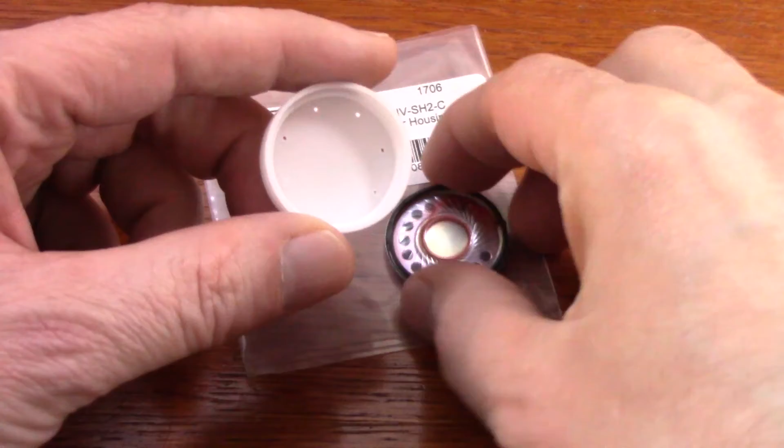So let me head to the bench and I'll show you the part that I'm going to be designing a mold for. This is a kit for a speaker enclosure. This is a small speaker. It's designed to go into a model train. And it's a press fit into this enclosure, which helps baffle the sound and prevent the sound from the back canceling out the sound from the front. I'm certainly not an expert on acoustic physics.

This particular enclosure is printed by Shapeways. What happened recently is apparently they doubled the cost or the price of making these parts. So it's gotten a little bit prohibitive for TCS. And they asked me if I could make some short-run injection molds because the volume that they have doesn't warrant making a real injection mold.

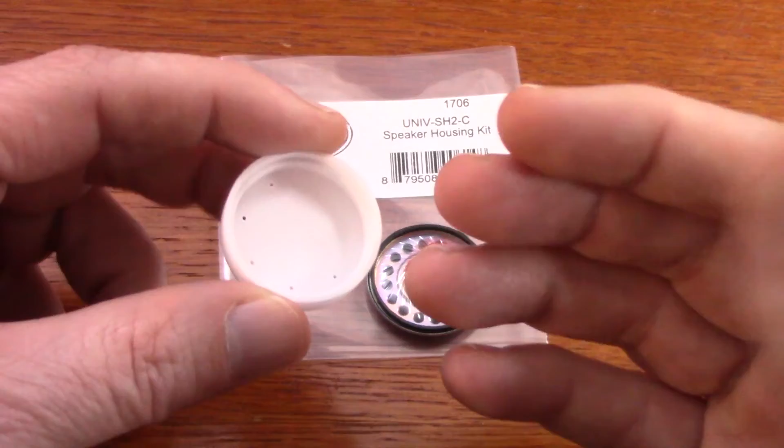And what I mean by a real injection mold is one that has ejector pins. So basically, when the mold parts come apart, you've got some pins that automatically push the part out. The part drops, the mold halves come back together, and it can just keep making parts over and over again.

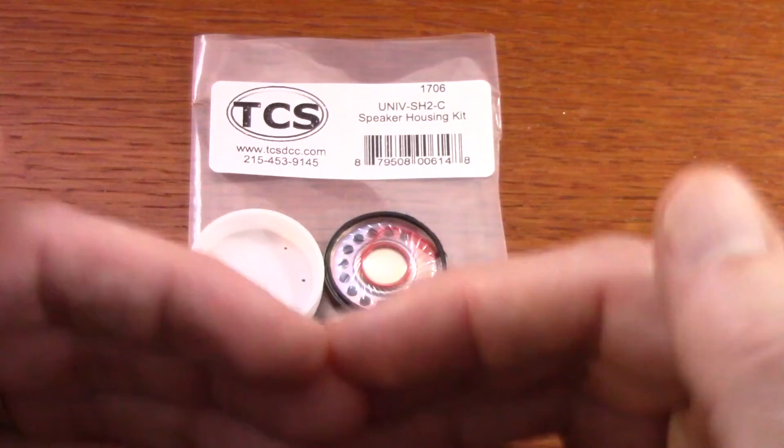What I'm going to design instead is a short-run injection mold, where I have to put the mold into the machine, take the mold out of the machine, pull it apart, and then eject this part with a very simple ejector pin. The goal is to end up with a mold that consists of a core and a cavity.

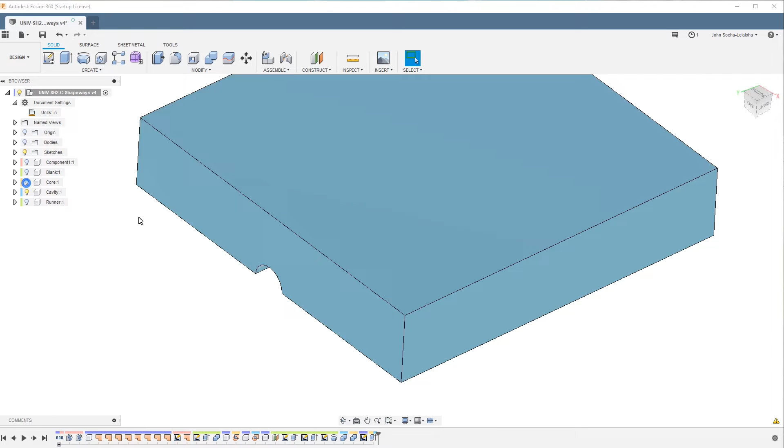Let me hide the cavity. Here's the core. Generally the core is the part that has something that sticks up, and the cavity is something that has a hole in it. So if we look at the cavity now, you can see it has a hole in it. Now this mold looks fairly straightforward. There are a couple challenges that we'll run into when we create it. So let me go ahead and I'll switch over and start a new file and walk you through the process.

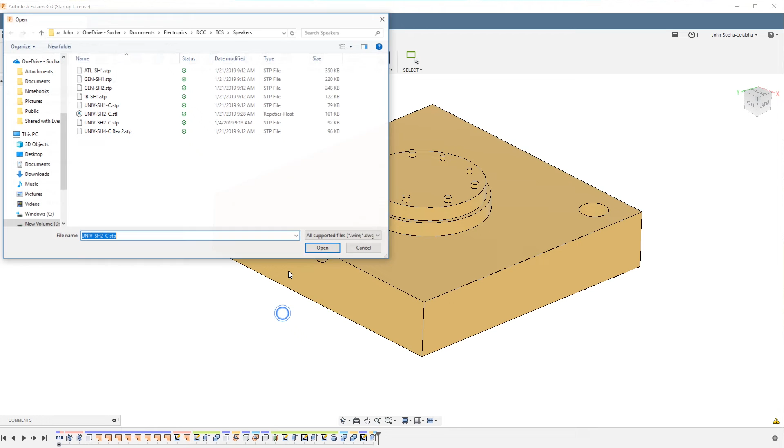I'm going to start by loading the STL file, the step file that I got. I like step files rather than STL files because you can modify them, as you'll see in just a minute. So this has a couple of things I want to change. First, I want to capture design history, and then I want to turn this into a component. So I'll say create components from bodies, and I'll call this the enclosure. Okay, so now I have that enclosure.

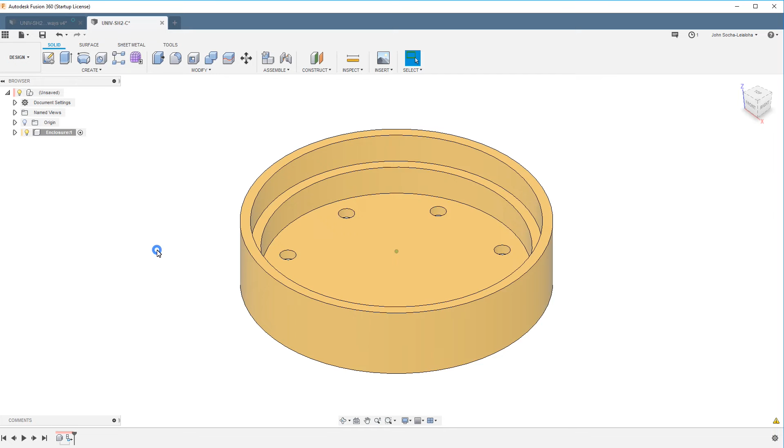I'll go ahead and modify the enclosure. First, I'll activate it. I need to add some draft. These walls are straight up and down right now, and that's not so much of a problem for the outside wall, but for the inside walls, the material will shrink and grab onto the mold. So I need to add some draft to these, which is an angle, so it comes out of the mold easier. I'll use a tool called draft for that.

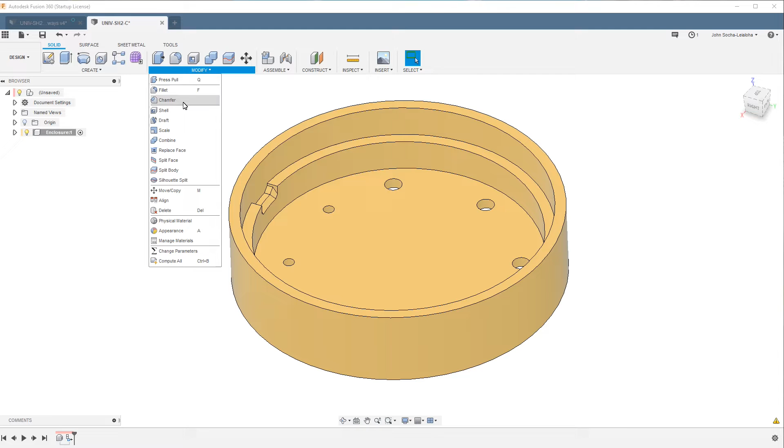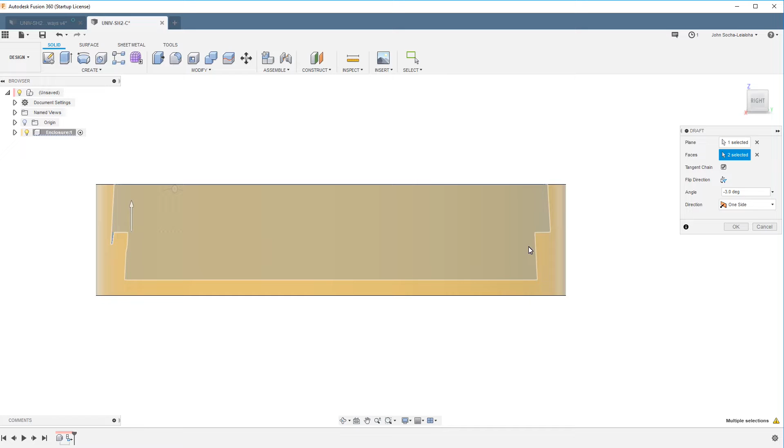And I want to use this as the draft plane. Using this as the draft plane means that this outer circle right here is the critical diameter, so I'm not going to be changing that diameter. Now the faces I want to draft are these two. And let's see if I have the correct angle. So I have -3, it's going the wrong way. So I want to change it to +3, and now it's going the correct way.

I now want to do the same thing for the outside. So I'll right click and say repeat draft. I'm going to use the same plane, but this time I'm going to use the outside face, and that's going the wrong way, so I'll invert it.

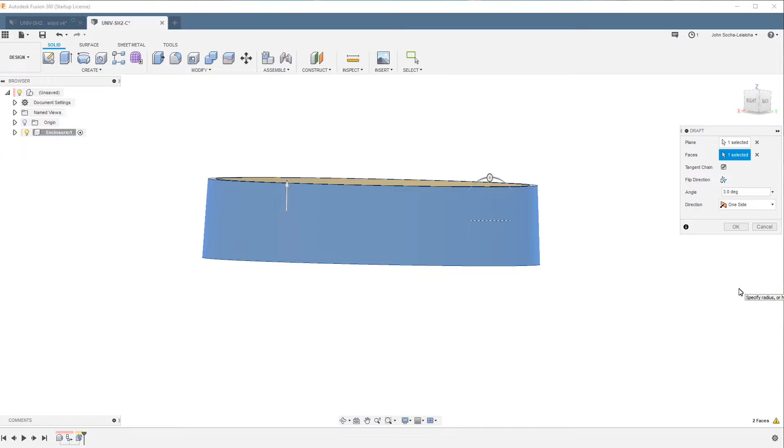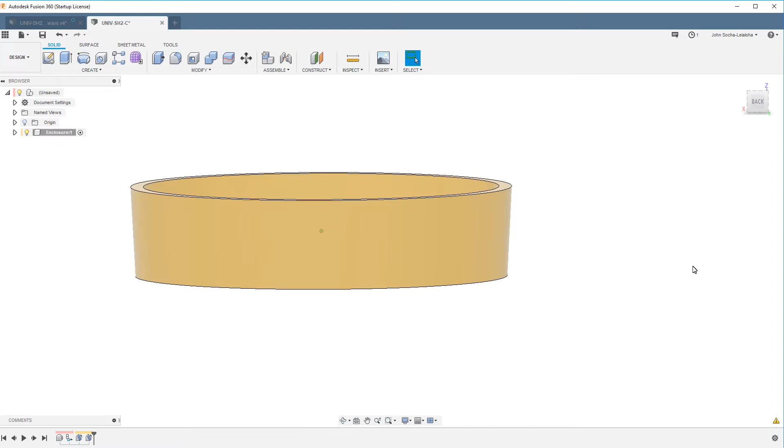And now if we take a look at a cross section, and I pick a plane here, you can see that the inside and outside walls are parallel to each other, which is exactly what I want. So I'm going to save this, and I'm going to save it to a folder called speakers. I already have the other file I showed you, so this is going to be a cleaner one, hopefully, than the one I had before.

All right. Now I'm going to create the two mold halves. What I'm going to do is just create material that doesn't have the two different pieces. It's going to be one piece, and then we're going to split it apart. I want this to be the parting line. In other words, this is where the runner will come in and inject the plastic into the side of the part.

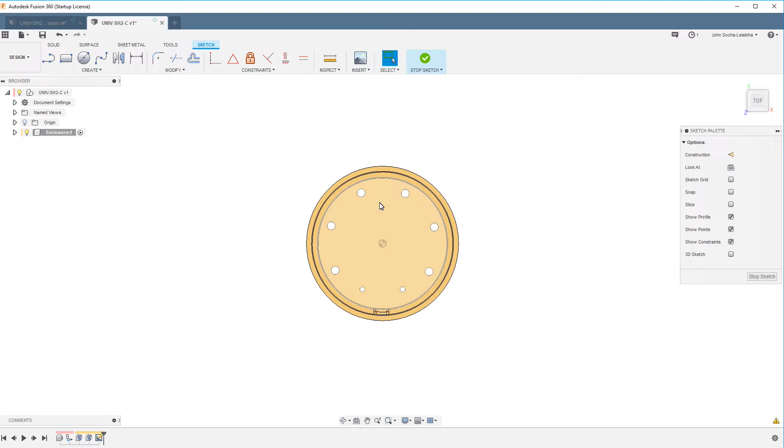So let me go ahead and start with a sketch. I'm going to create the sketch on there. I'll just create a rectangle, and then I'll constrain it in a minute. So the first thing I want to do is make this 2.5 inches tall, and that's because this is the maximum height for the machine that I'm going to use. And the width, I'm also going to make it 2.5 inches. I'm not sure it really matters exactly how wide it is.

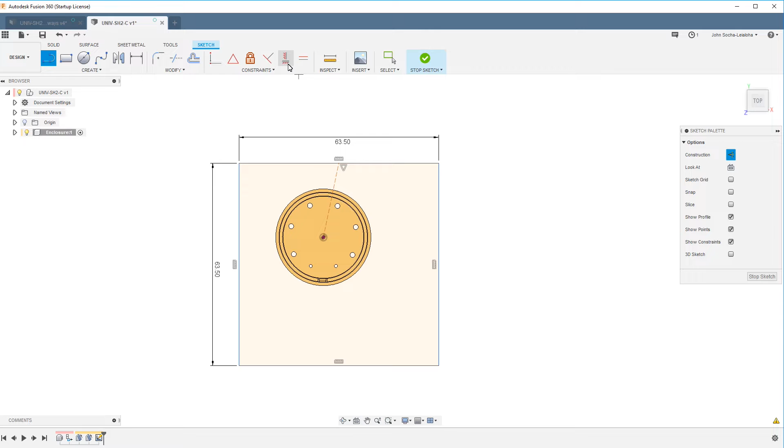I want this to be centered vertically, so a trick I use is to create a line that's a construction line, and I'll go from the center point there to the midpoint of this line, and then I'll just make this vertical, and now it's constrained that way. The other thing is I want this close to being about halfway down. It doesn't have to be exact, but this is so that the clamping force is fairly evenly distributed around it. Okay, so that's the profile that I want.

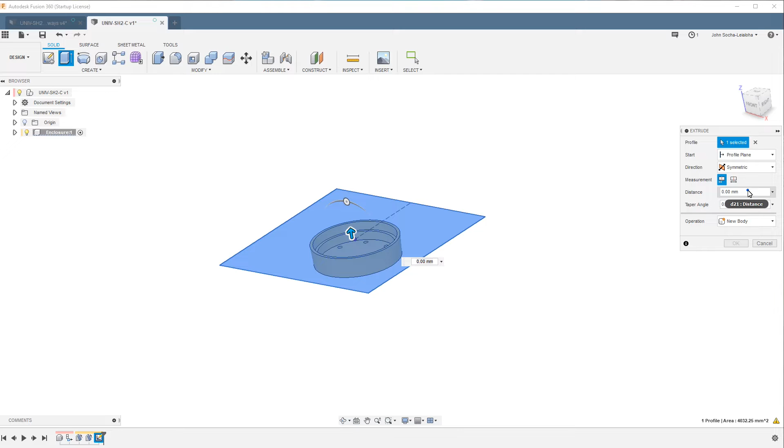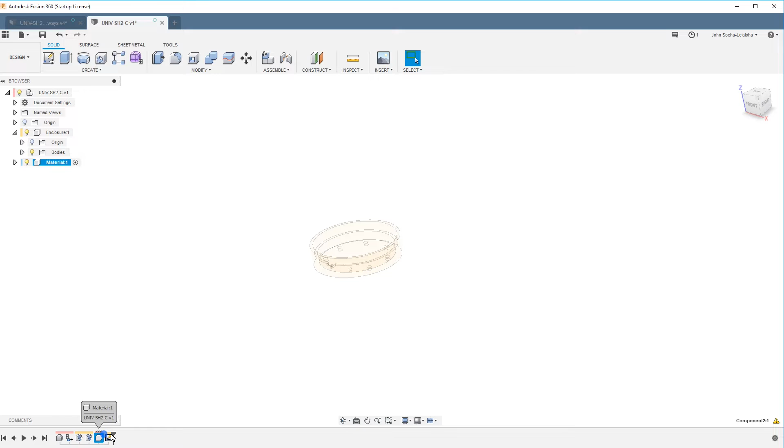Now what I'm going to do is extrude this. I want it to be symmetric, and I want the half distance to be 0.5 inches. Oops, I forgot. I do this sometimes. I really wanted to make this sketch as a separate component. So I'm going to go back and create a new component, which is going to be the material. This is something that's temporary, and it's going to go away in a minute. And it's activated, and so now I want to take this sketch here and drag it down to that. And now you can see it changed colors to match this.

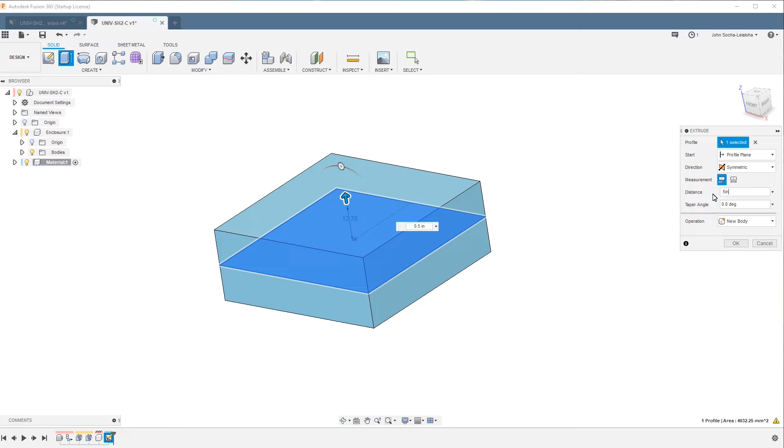Now that this is activated, I'll go back to the extrude, do my symmetric, make it 0.5 inches in each direction, and I want it to be a new body. So at this point, this material is hiding our actual part. I'm going to turn the material back on and then select Enclosure so you can see what's going on. The next thing I want to do is subtract this enclosure from the material here. That will create a cavity inside.

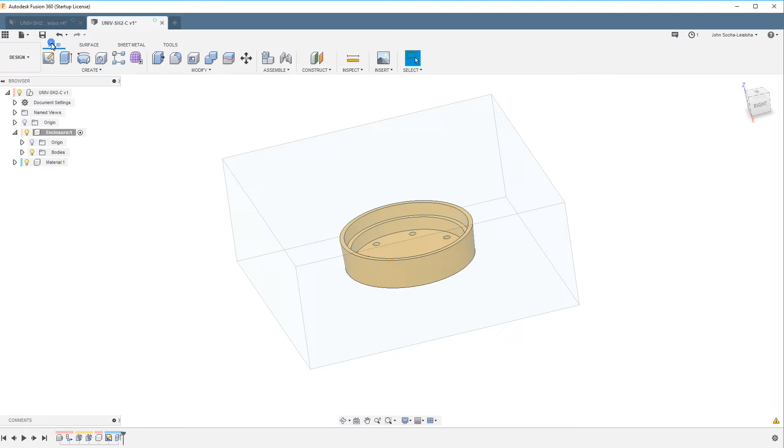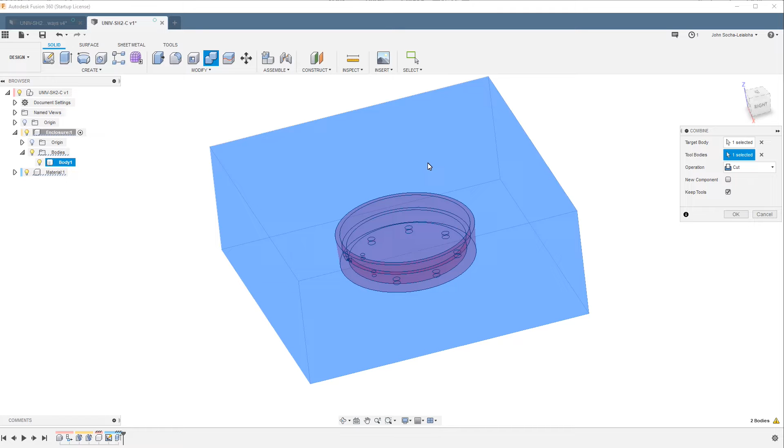So I'll go ahead and say Modify, and then I'll use Combine. It wants the target body, which is this, and then it wants the tool body, which is the enclosure, right there. And I'm going to have it keep the tool bodies, and I'm not going to create a new component. I'll just keep it like this. So nothing really changes if we have the enclosure still on, but let me go back to here. I'll turn off the enclosure, and let's do another section analysis.

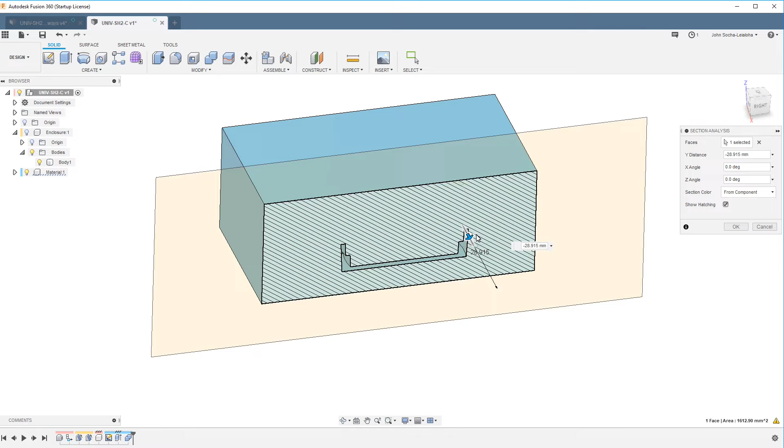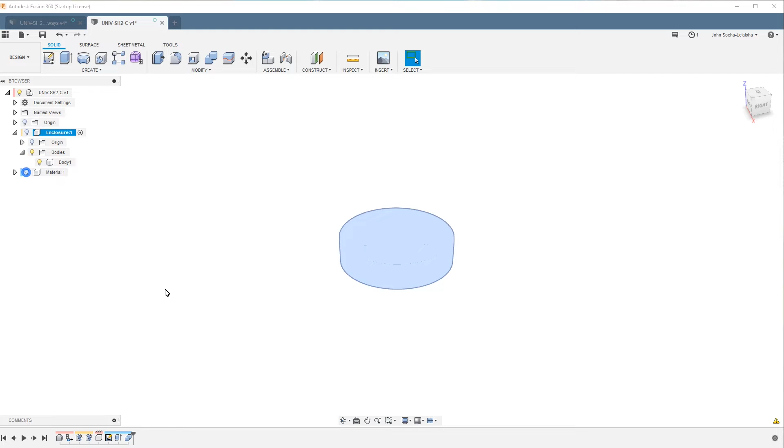So you can see it has removed that from the material, but at this point we still have a solid block of material. We don't have it in two parts. So we need some way to split this into two halves, which will become the mold halves. In order to split this into two halves, I'm going to go back to the enclosure and hide the material. Oops, I want to show the enclosure.

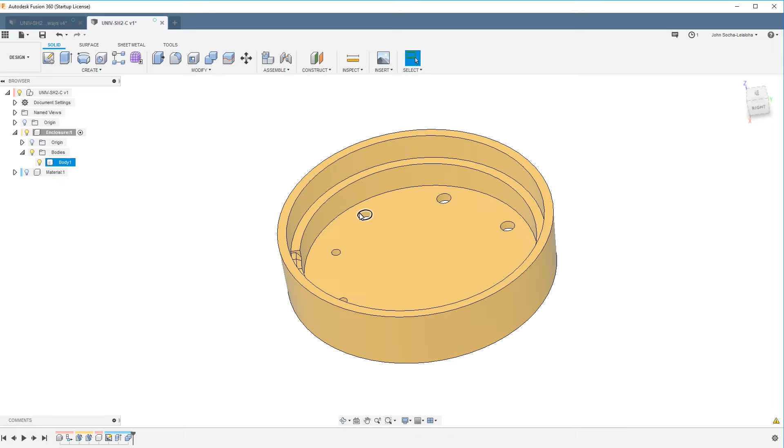What I want to do is create a surface that goes from here out, and that will be used as the cutting line to cut the two mold halves apart. It won't do it completely though, because there are these holes that go all the way through. So I'm also going to have to tell it where I want to cut it, on the top or the bottom. In this case, I want to cut it on the bottom because I'm going to have the pins come out of the part that projects out, because that'll be easier to mill.

So I'm going to go into the surface workspace, and actually what I'm going to do is roll this back. No, I'm going to keep it here. So I'm going to go into the surface, and I'm going to close these off. I'm going to just hit enter and then keep using the keyboard and the mouse, because that's a lot faster.

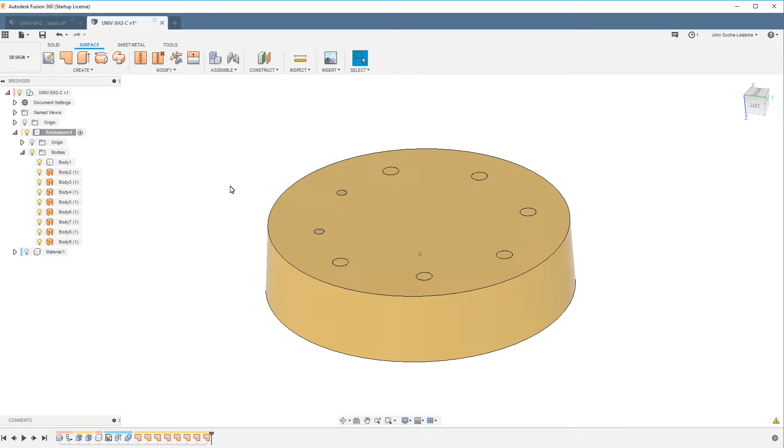I have those all closed off, as you can see, and now I'm going to create a surface that goes from here out by creating a sketch off here. And I'm going to create a projection. I usually like to rotate it like that so that I'm catching the edge that I want.

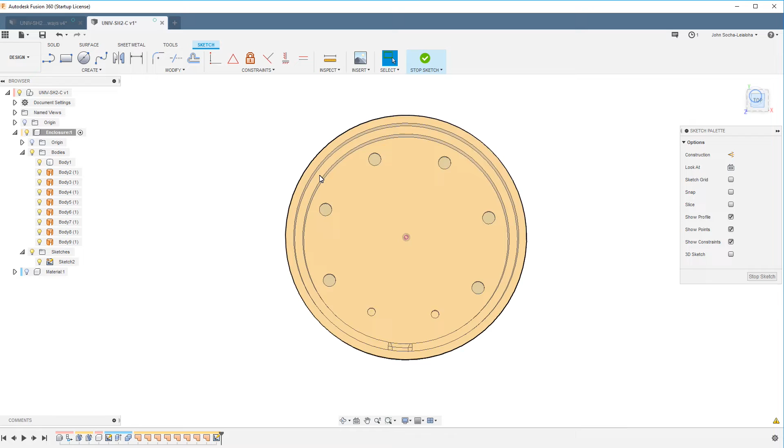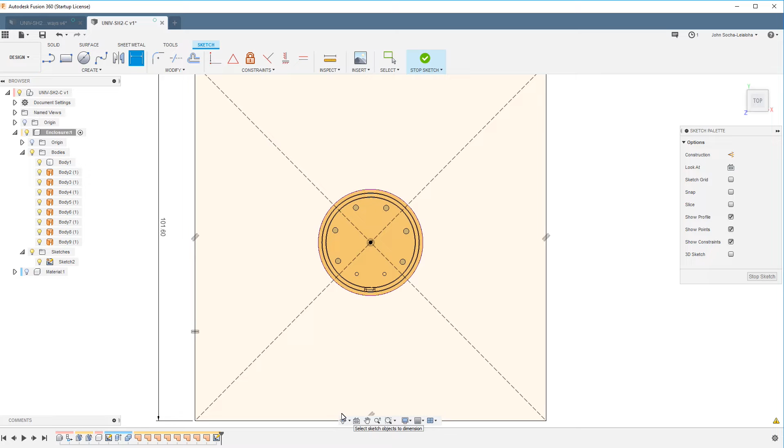And then once I catch that edge, I'm going to look at the top and create a rectangle that's larger than I need. I'm going to use a center rectangle. And I'm going to make these two sides equal. And then set the dimension to be 4 inches, which is way more than I need. Now that I have that, I can create a surface from that sketch.

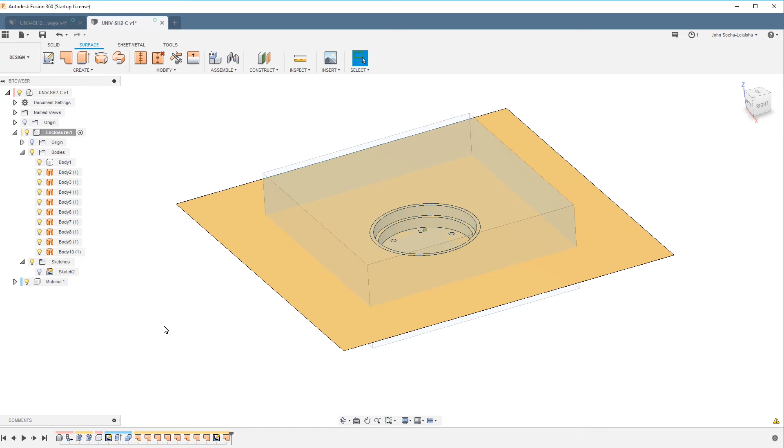So at this point you can see that I have it completely closed off on the bottom there as well as out here. If I show the material again, you can see that that surface extends outside of it. The next thing I'm going to do is go back to here just so you can see what's going on with the different parts, and use another feature called boundary fill. I'm not sure why it's called boundary fill.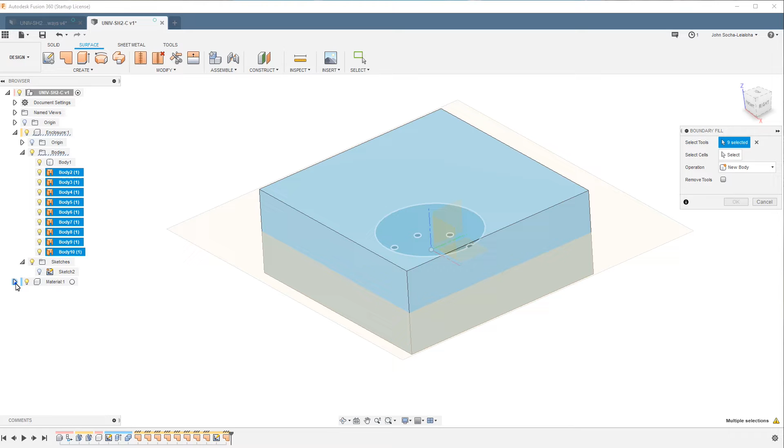What this will allow me to do is to split this part in two using the surfaces that I created. So the tools that I want are these surfaces here, and then I also need this body here. When I do that, you'll notice that I get these 3 checkboxes, and that allows me to select which part I want to keep. This will be the core, this will be the cavity, and I don't think this will produce anything. So I'm going to go ahead and create this as a new component.

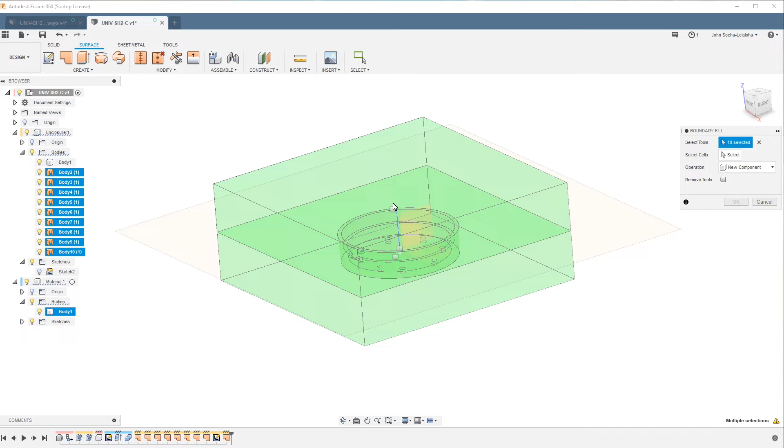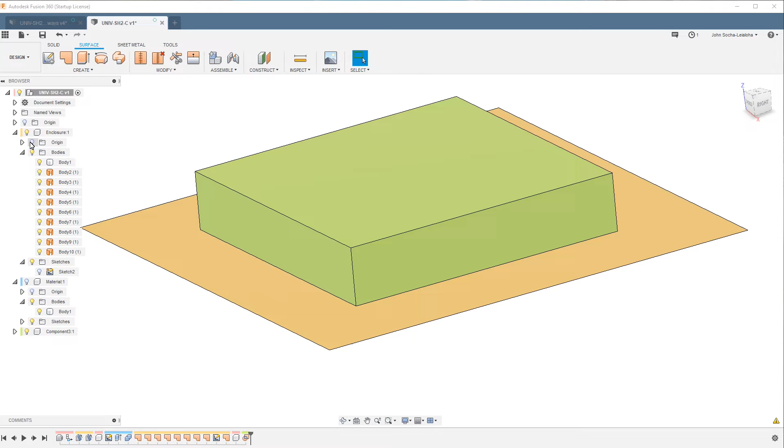I'll select the top, and that will give me, oops, this happens sometimes. If you have everything selected and you forget to say select cells, it does something strange. So I'll just go back and do that really quickly again. Okay, now I'll click on select cells, and then I'll click that cell. And when I click OK and hide the material and the original enclosure, you can see I now have the core. I'll do the same thing to create the cavity.

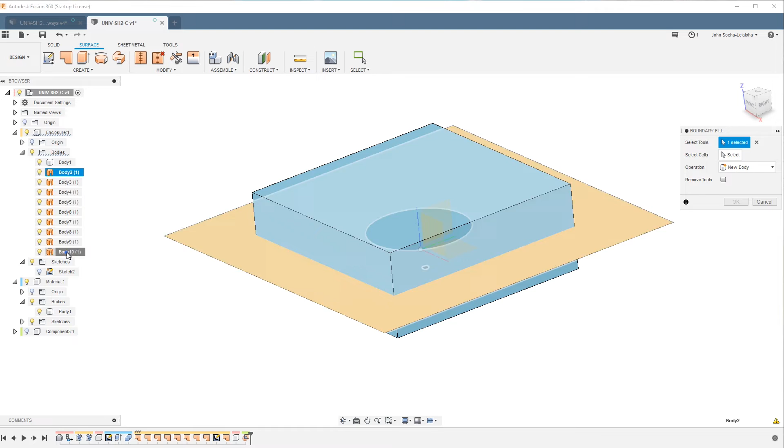So I'll hide this guy, show the material and the enclosure again, as you can see. And then I can say fill body, boundary fill again. Select these as well as this body. And now for select cells, I'm going to use the bottom into a new component. And if I hide these guys, this is my cavity.

So I'll go ahead and call this one the core, and I'll call this one the cavity. Then I'm going to hide the others. So at this point, I have the 2 mold halves. Next thing I want to do is I want to add the alignment pins. And the first thing I want to do is remind myself of which way is up on this.

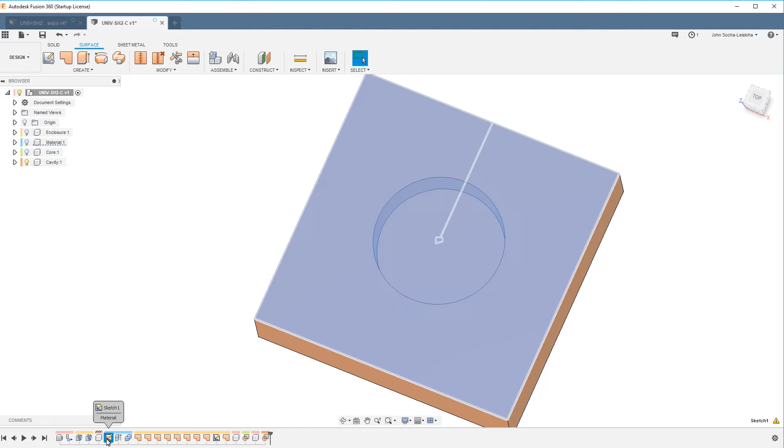So if I go and click back on the sketch that I used to create the material, this is the line that I had going from the center to the top. So that tells me this is the top. I'm going to create the alignment pins down here. And so I'll go back to solid, and I'm going to create a sketch without selecting one of these components, because I'm actually going to cut the alignment pins into both the core and the cavity.

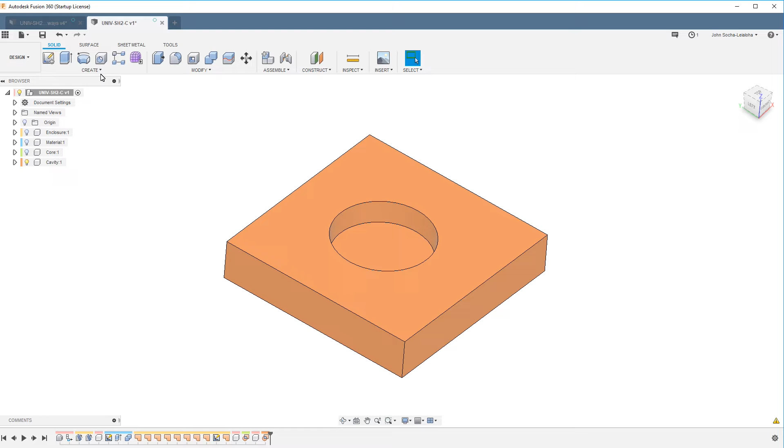So I'll create the sketch, and then click here to make sure, yes, that's still up. And I'm going to create a circle here that is going to be 0.24. It's going to be a 1/4 inch, so 0.25 inches, but I want to ream it to the final size, so I'll make it a few thousandths under. So I'll make it 0.247 inches.

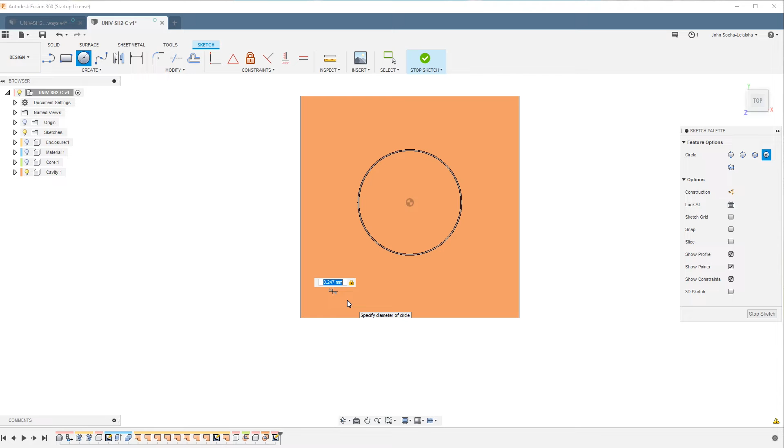And I'm going to use a reamer for that, as I said, and then interpolate this so that it's close in size. I'm also going to draw a sketch line here. And I like to make it a construction line. It doesn't need to be.

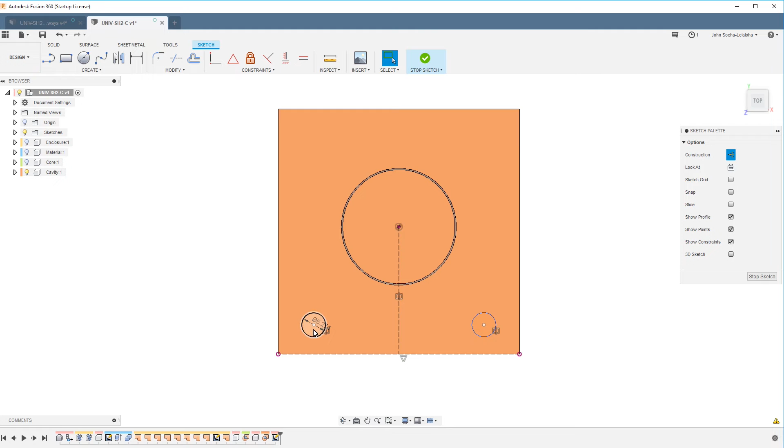But the purpose of that is to allow me to mirror this to the other side, so that when I decide where this is going to be, this is going to be the same place. So there are many ways that I can dimension this. One thing I'm going to do is I'm going to draw a line there, and then I'm just going to say, okay, let's have this be on the diagonal, and then I'll set the distance from this edge to be

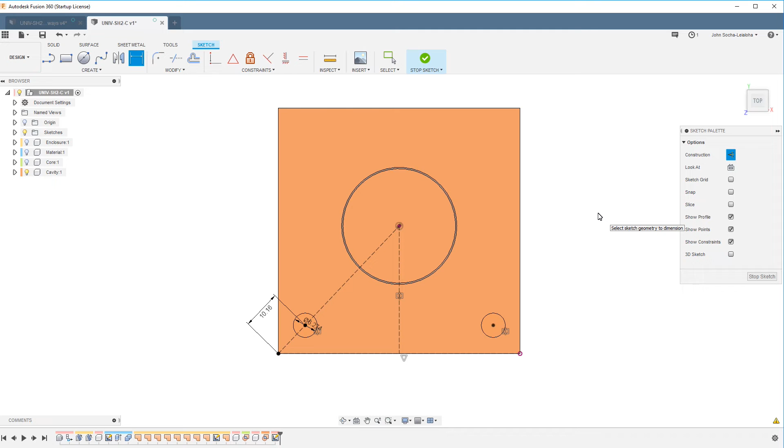0.4 inches. And you may wonder why I keep going between inches and millimeters. That's because I have things such as the speaker enclosure that is all in millimeters, and then I have things like the dowel pins I'm going to be using that are in inches, the blank size is in inches, etc. So I just kind of go back and forth.

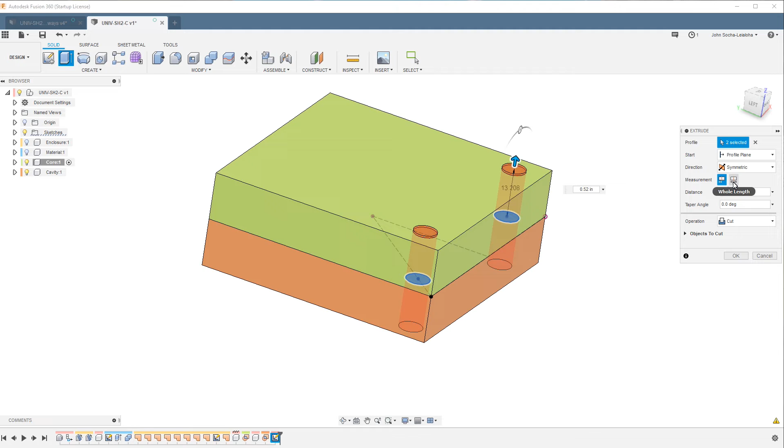Okay, so now I have the location of the two dowel pins, and what I'm going to do is I'm going to go ahead and say extrude. But before I actually extrude, I'm going to show the core as well, so that I can say symmetric, and then the total distance will be, these are 1/2 inch, so I'll make it 0.52 inches. It doesn't hurt being a little bit longer. And I want that to be the whole length rather than the half length. So now I have my two holes for the dowel pins.

Creating the runner and the gate that goes into the part is kind of an art. You're going to see how I do it. Other people, I'm sure, do it in other ways. The idea, though, is that the sprue which comes in from the machine itself needs to be round for the best flow of plastic. I make it so it's slightly off from round, just so that there's a little bit of a draft on the sides, and you'll see what I mean in a minute.

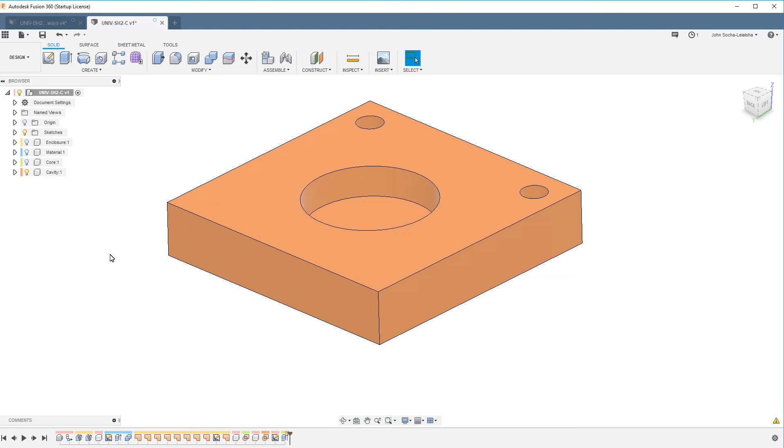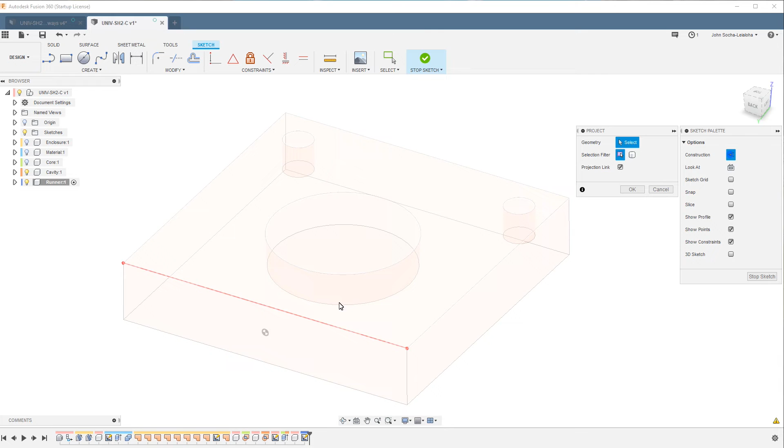Again, I'm going to cut this through both the core and the cavity. Actually, I'm going to do it in a different way. What I'm going to do is I'm actually going to create a component that models the runner and the gate. I'll just call it runner. And then I'm going to subtract that from both the top and the bottom. So I'll start by drawing a sketch along this face here, and I'm going to pick up this line here as a construction line. And then I'll turn that off, go back to the front.

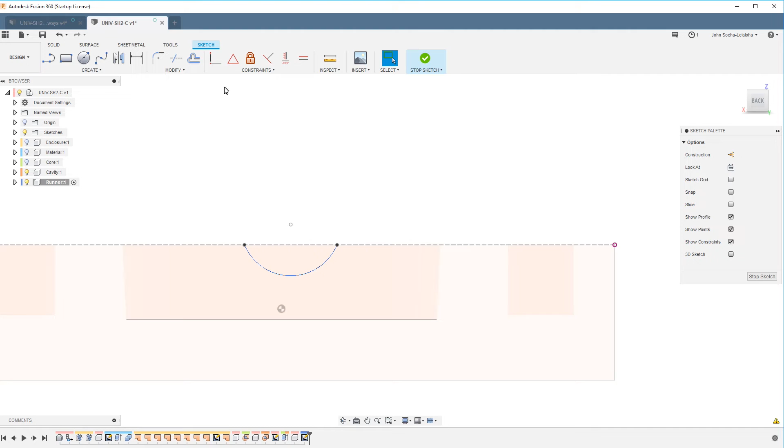And then I'm going to draw half of a circle. Well, kind of a circle, as you'll see. So I'm going to use a 3-point arc. Okay, so this has no constraints right now, but I'm going to start by constraining this so it's vertical to here, which will make it centered. Then I'm going to constrain this distance here, which is what's going to give me the draft. So I'm going to use 0.005 inches.

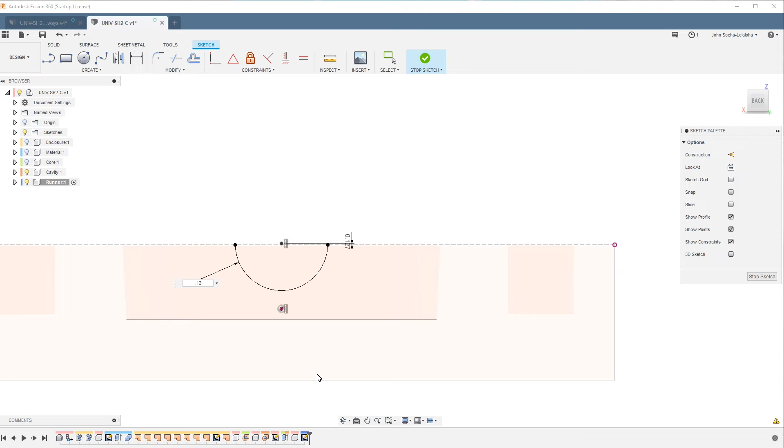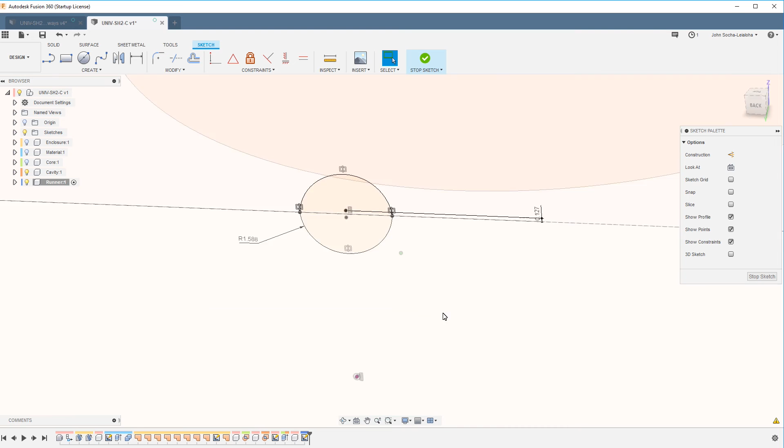And then the diameter that I'm going to use for this is going to be 1/8 inch, 0.125 inches divided by 2. Okay, so it's a little hard to see, but that has a little bit of an angle on the end because it hasn't quite finished the circle. Then I want to mirror this so that it becomes both sides. And extrude that, which will be the first part of the runner.

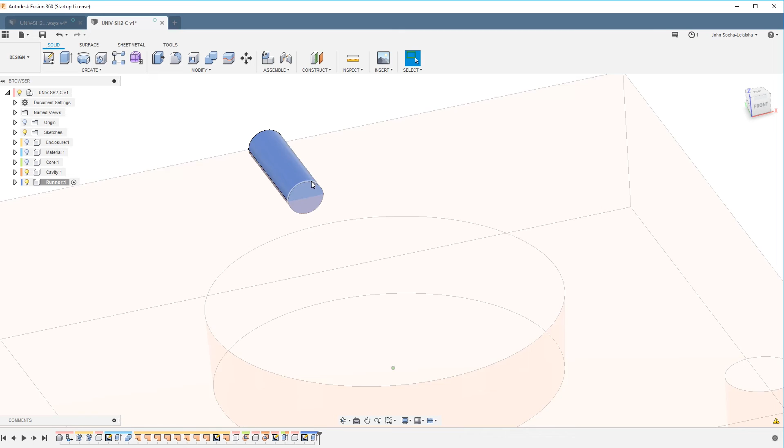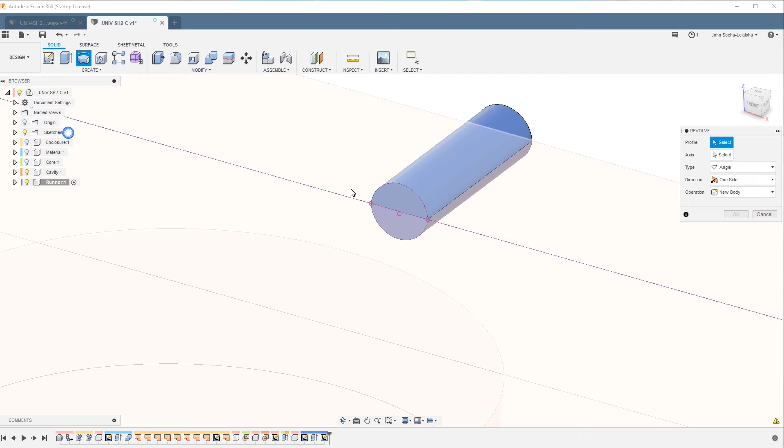And I'm going to go 0.4 inches. That wasn't 0.4 inches. Let's try that again. 0.4 rather than 4. I don't know if this is the right length. We'll figure that out. I'm going to add another sketch here. And for this one, I'm going to just do a projection of this and this, which will give me the half circle so that I can basically revolve it and turn it into the part that goes into the gate. So we'll revolve this around this axis here. Join. Okay, and that's not going far enough yet, but that's okay.

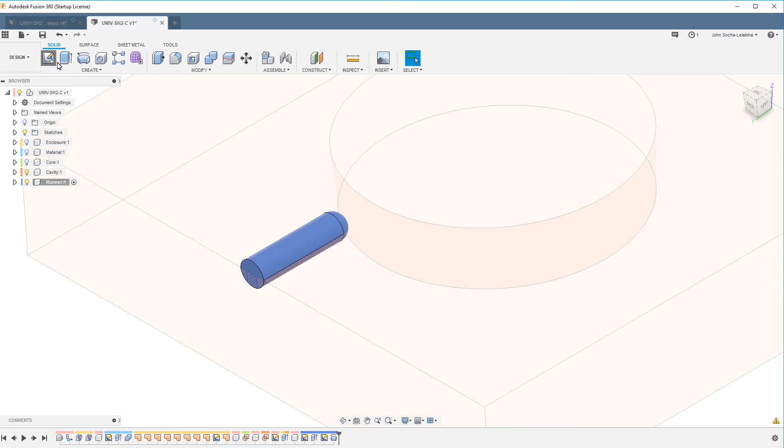The next thing I want to add is the gate. So there are several different ways to do it. I think what I'm going to do is a projection from above and then extrude it with draft. So I'll create a sketch here, and I'm going to hide the cavity at the moment. I'll create a rectangle, and I'm going to project this line here.

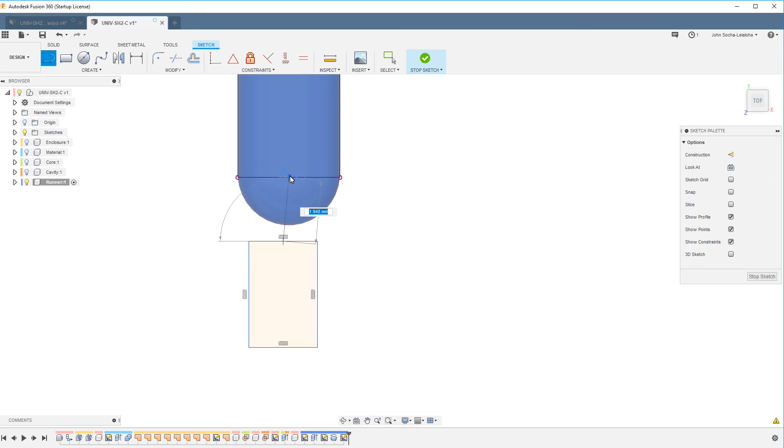And there are a couple of reasons for doing that. One is I want to do the alignment trick that I showed before. And then I also want to set the distance here. 1 millimeter is fine. Actually, 0.1 millimeter is good. Basically, I want to make sure that this is inside there.

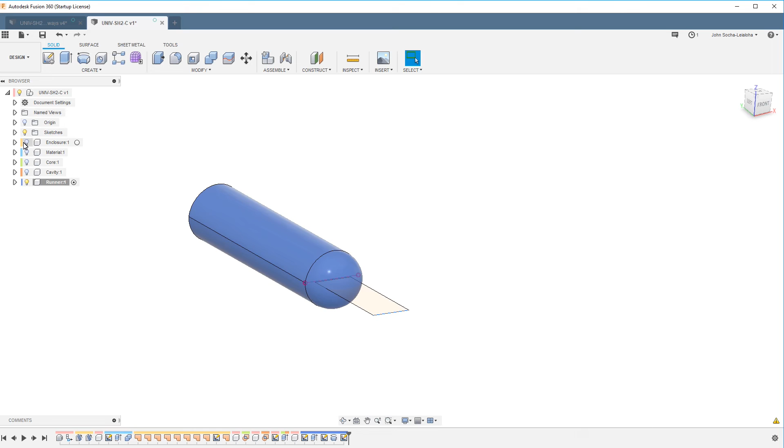Width of the wall width on the... I'm going to stop this. I need to check the wall width on the enclosure. I believe this is... let's see, that's 14 millimeters and that's 15. Okay, so 1 millimeter is the wall thickness. And the reason that's relevant is because I want the gate to be about the depth of the wall thickness, something like that, and then I want it to be a little bit wider.

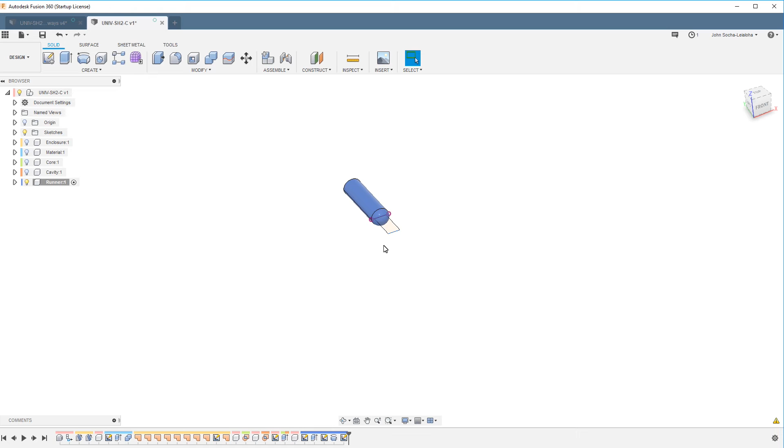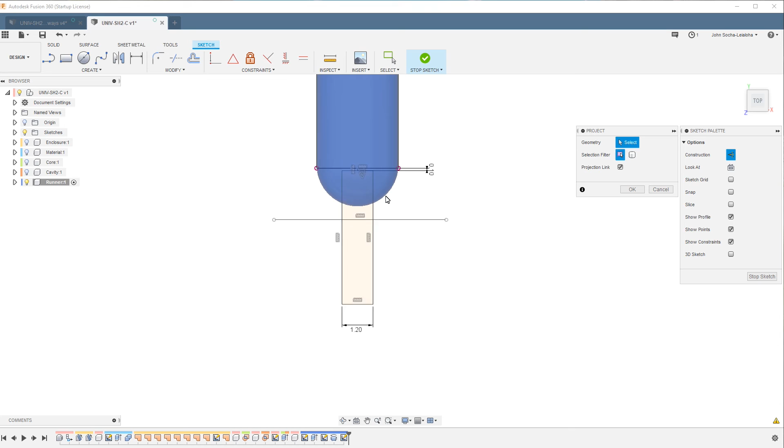So I'll go ahead and edit this. And so I'll make this 1.2 millimeters, and then there's another distance I want to select as well. And for that I need to have a projection of this. Let's see if that works. No, I was hoping to get a projection of this curve here because I want this distance here, but it's not letting me do that.

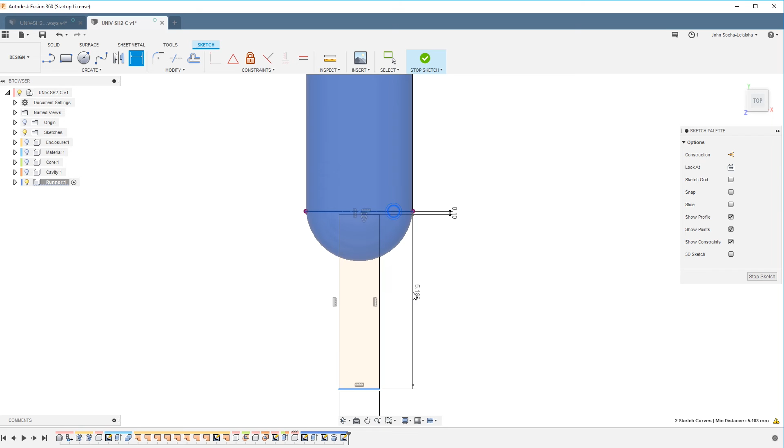So I'm just going to have to set some dimensions here. So I want this to here to be about 2 millimeters. Let's try that. That looks about right. I'll make it a little bit longer. That looks too long. 2.5. What I want is it to intersect the plastic about here, but because of draft and other things I need to make this a little bit longer.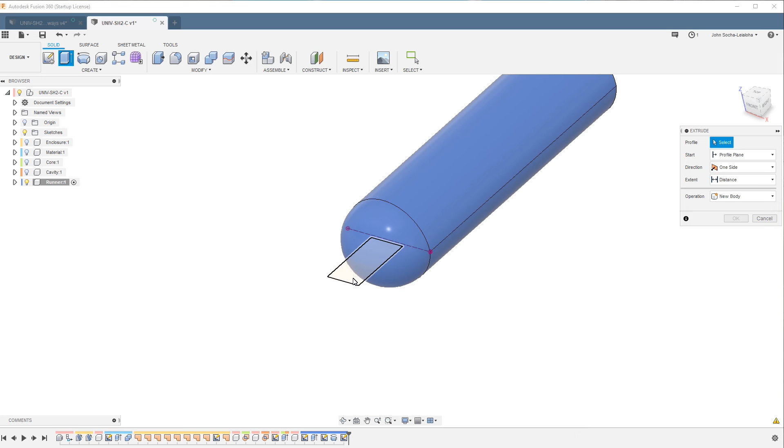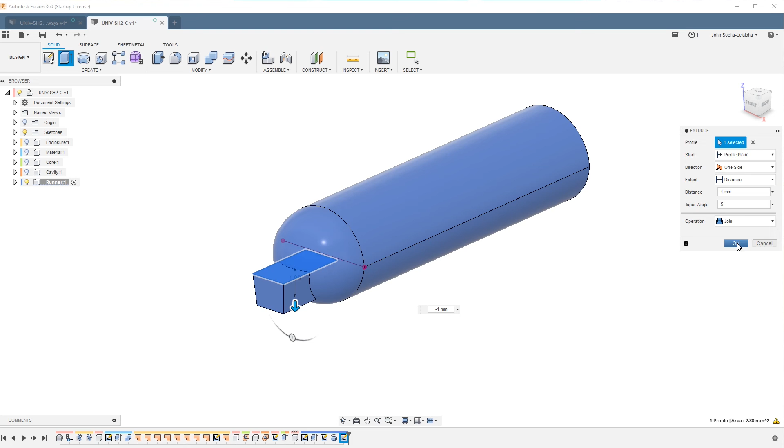Okay, now I'm going to extrude this. I want to extrude at -1 millimeter. Millimeter, not meter. I want it to join, and then I'm going to give it about a 5-degree taper, -5 degrees. And that taper basically helps it come out of the mold a little bit easier. Okay, so if I turn my cavity back on, you can see that doesn't go far enough in. So I'm just going to change the extrude on this.

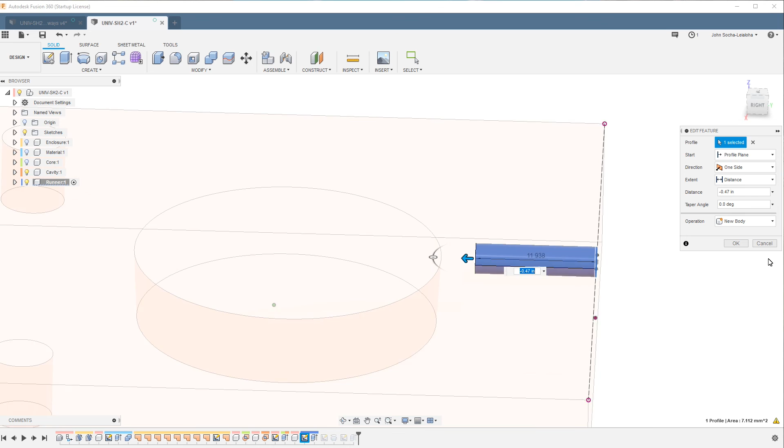There's probably a way to do this through parametrics, but I'm just going to do trial and error, which, as I say, is not the best way. But for molds, I'm probably not going to be changing this once I have it working, so this approach is fine. And at some point I'll probably do a different approach where I work my way from here back. And that's probably a better way.

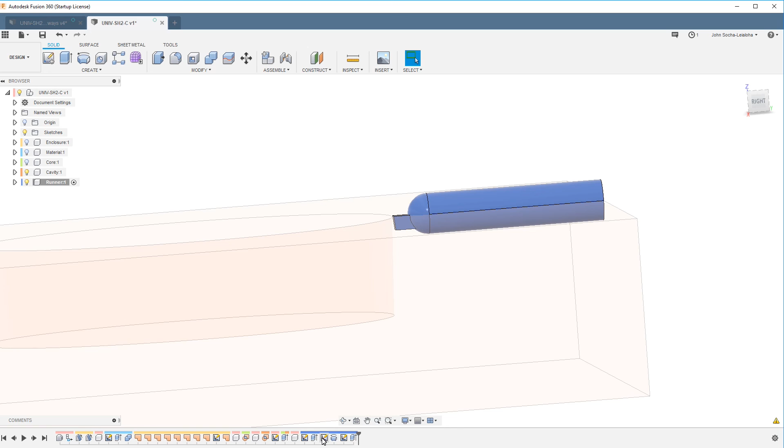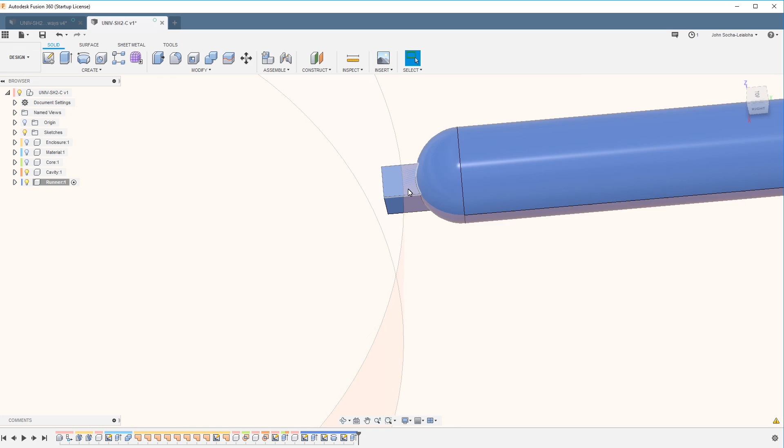So do 0.5, not quite enough. See, I want it to completely go into the cavity there. So I'll go too far, 0.54. That is actually really close. So I'll just back it off a tiny bit. And partly what's going on here is I'm used to what I want this to look like. So I don't want this to be really long from there to there. And so I'll go ahead and make it just a little bit shorter. And that looks pretty good.

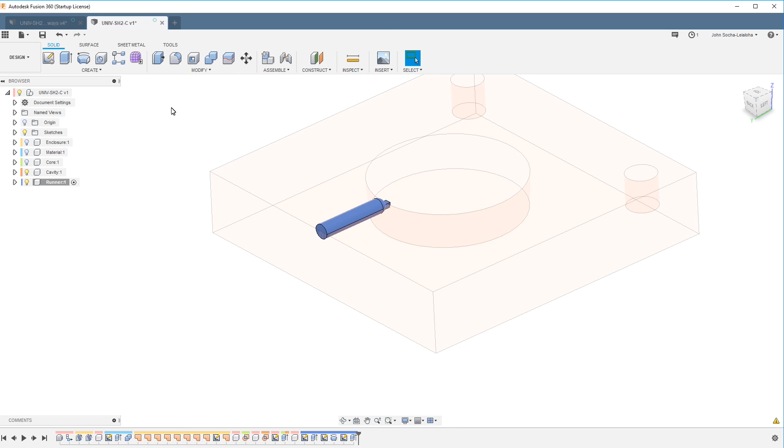Okay, so now I need to subtract this from the core and the cavity. And this is where we use the modify again. So I'll go to the cavity and I'll select, and that's just so that it becomes part of that feature or component. So I'll select combine. This is the target body. The tool body is this guy. And I want to keep the tools. So I'll just go ahead and cut that. And now you can see I have the cut in the cavity.

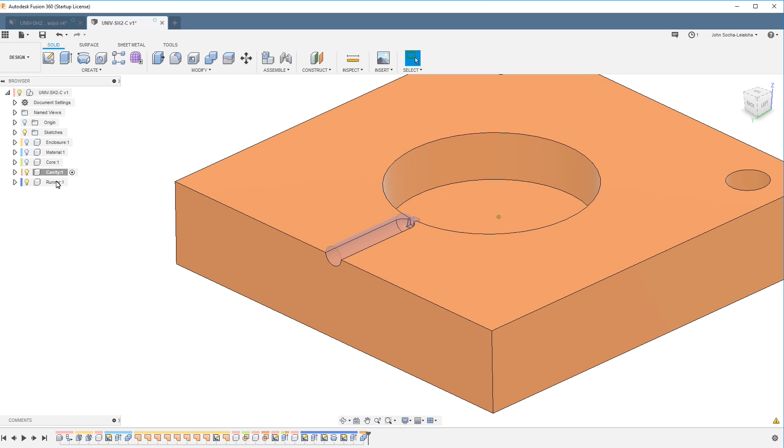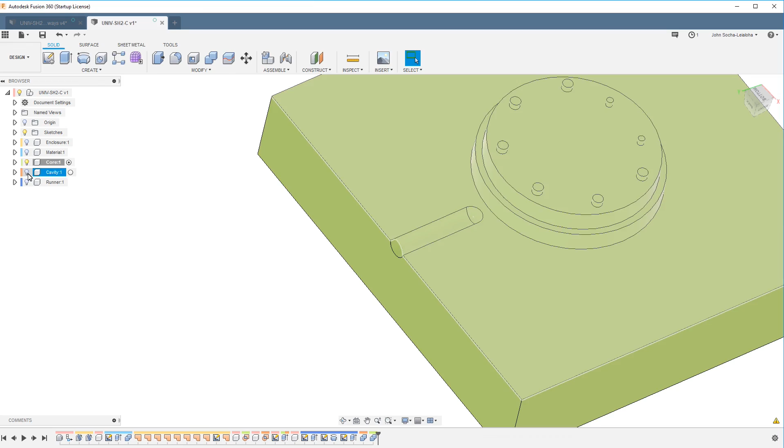Now I want to do the same thing with the core. So I'll activate the core, do combine, target body, tool body, okay. And now I'll hide the runner, and you can see that I now have it in the core as well as the cavity.

In the next episode I'll be working on the cam, and then I'll be making the injection mold, and then finally hopefully making some parts. My goal is to have them done by less than a week from now, because in a week I'm flying to TCS headquarters to spend a week there working with the guys on the throttles. And I'm hoping to bring some samples of these parts to them.